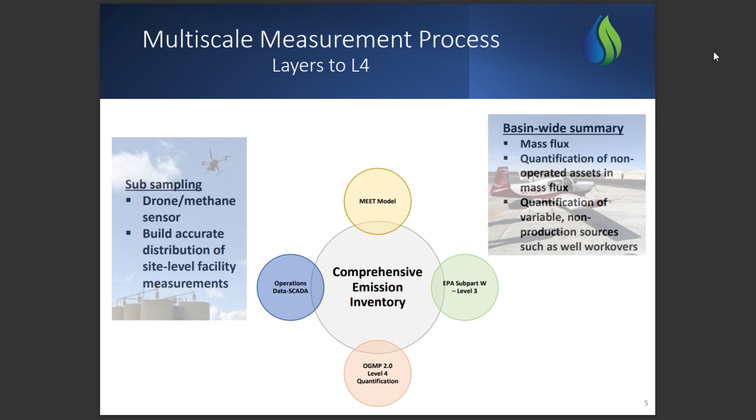So in order to inform that, we're adopting a number of other parts of data and information. One is operational data through our SCADA system, our CygNet system, understanding what is happening in the field and coordinating that with other things going on. We're also using site level and source level measurement efforts through drones, high flow samplers, and other technologies like stack testing our engines. Those measurements now begin to even better inform your comprehensive emission inventory, which is going to ultimately make the reconciliation with a top-down measurement that much more comprehensive.

Then we'll get into a little bit of the basin-wide measurements that we made here in the first quarter of '22, our mass flux. But we also looked at quantification of non-operated contributions within that mass flux, and other types of non-production related emissions that don't happen on a day in and day out basis from our operations, like a workover rig on a well that needs help. We're looking at how those emissions add into the production emissions that we have on a basin-wide basis.

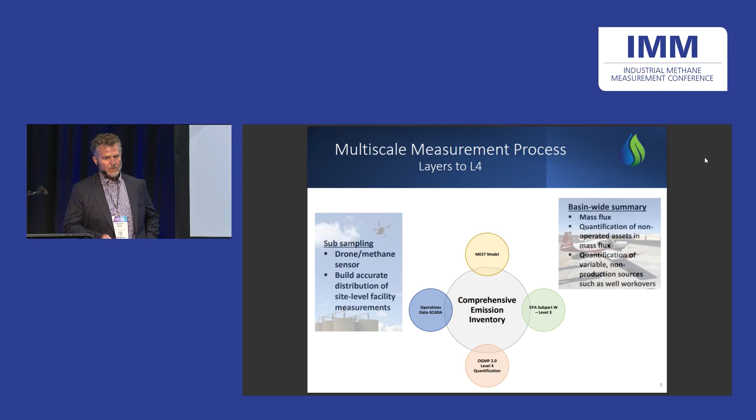The technologies that we're using right now—we've looked at a number of different technologies, but we used a manned aircraft with Scientific Aviation, their Mooney aircraft that you saw in a couple presentations. They conducted raster flights and basin-wide flux flights. We're looking at site-level quantification using a drone and a methane sensor, as well as aerial LiDAR through Bridger Photonics.

And then the bottom up, as I said, we're looking at quantification efforts of different sources. We're looking at high-flow samplers through our LDAR program, our leak detection and repair program, and then looking at an engineering simulation called MEET, which stands for Methane Emissions Estimation Tool. It's an open-source tool that was developed by Colorado State University and other researchers. That begins to give us a broad idea of what each individual facility's emissions look like on a temporal basis, against which we compare our measurements.

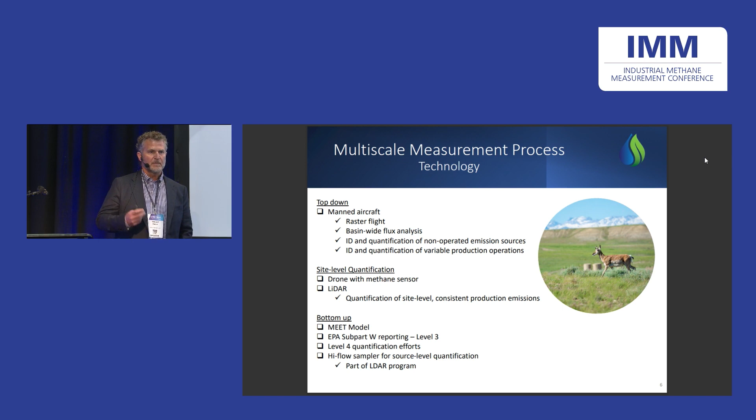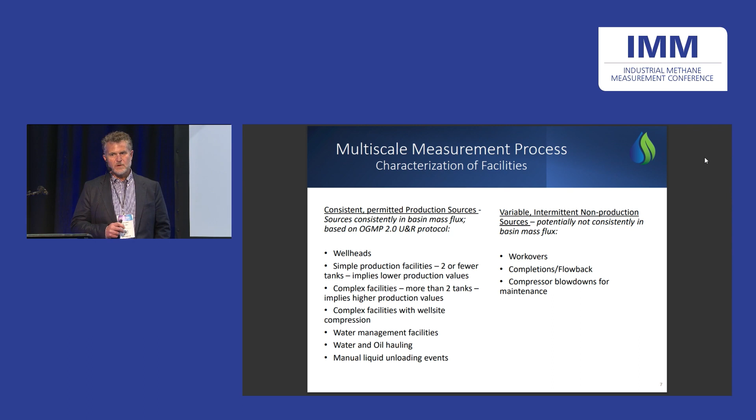We looked at how we characterize our facilities to come up with statistically representative samples. We think there are 5 or 6 different contributions into our production level measurements listed on the left, and then a few of the intermittent, non-production sources that we're looking at on the right-hand side.

This study is really looking at one specific emission source. I don't have time to go into all the ones we've looked at, but this specific source is liquids unloading, when a well has enough fluids in it that it cannot produce. We're predominantly natural gas, and those fluids tend to restrict gas production, especially in older parts of our field where we don't have enough reservoir pressure for the wells to produce.

All of our wells are on plunger lift, and the plungers actually help reduce the instances of liquids unloading through this process. But what I want to walk through is the value of level 3, level 4, level 5, and how it really relates to the emissions for this particular source for us.

Under the EPA and other emission factors that have been developed, the first option would be to look at a per-well basis. Data published by Dr. Allen at the University of Texas indicates 117,000 standard cubic feet per well per year. If we apply that to just the number of wells, we end up with about 3,315 cubic meters of emissions for that well.

If we then take the next step of actually looking at the number of times we conduct a liquid unloading on our wells, the emission factor is actually 9,800 standard cubic feet per event. You can see the difference by tracking the number of events instead of attaching it to the number of wells—you end up with about a third of the emissions. So we view this primarily as some activity factors, but primarily a level 3 effort where we're using an emission factor, but also using some events.

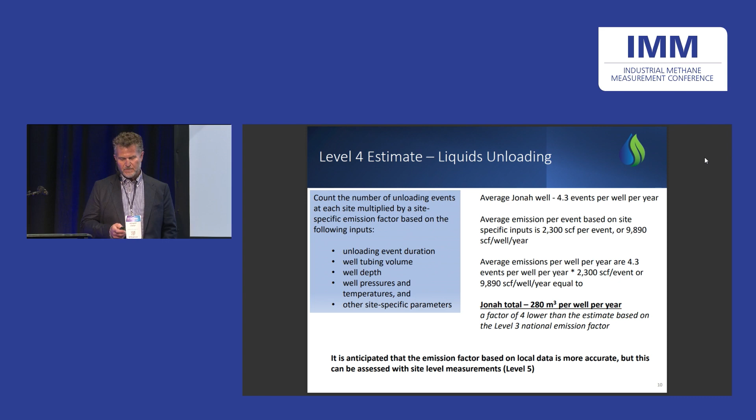So we wanted to see how accurate each one of these different measurements were, and we had an opportunity in April to go out and actually measure using manned aircraft with Scientific Aviation what the quantity of emissions were from 2 different types of blowdown or liquid unloading processes.

One of the key parts of this is we share our data with our operations team and tell them what we're seeing from an emission standpoint. We ask them to go out and say, how can you change operations to make this a little bit better? So the first measurement on the 27th was done comparing a better liquid unloading process, and the second measurement on the 29th was how we generally do this.

We have one of our production coordinators who really takes a look at this and says, I can do this better. You can see the differences—the first measurement on the 27th definitely shows that that is much more in line with the collection of activity factors, well volumes that you're blowing down, and so forth, than the measurement we made on the 29th.

So we think we're honing in now on what is the right process to do a liquid unloading, and making sure that all the calculations we're making through the equation—well volume, duration, pressure, temperature, et cetera—are going to more accurately represent what we're doing. Then we can take that local site level emission factor and apply it to all the events occurring in the field.

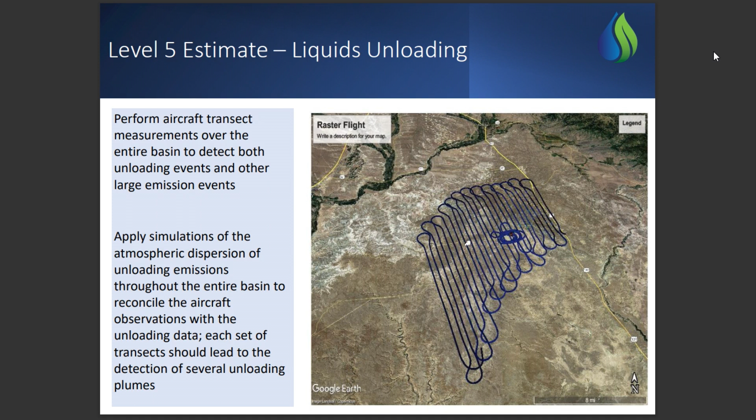We think that because of the number of liquids unloadings we do on a daily basis, the raster flights are picking that up as part of the background emissions. They're either going to see an event or see the plume resulting from an event. So the more often we can conduct raster flights, the tighter we can get those flight measurements.

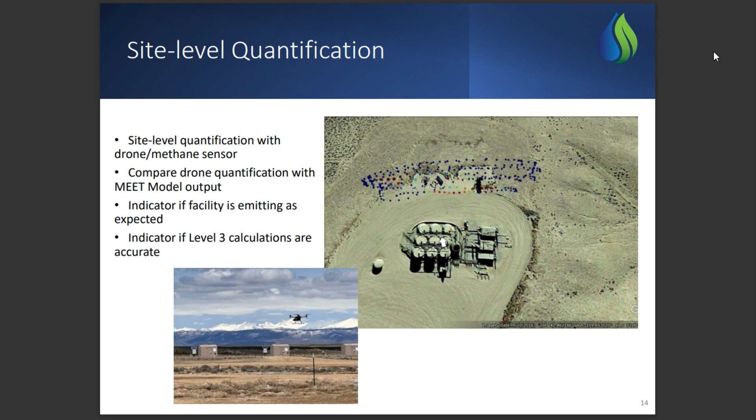The better it's going to be for us to include those liquids unloadings within our overall basin-wide flux. There's a couple other examples I won't go into detail on, but we saw earlier presentations on drone-based measurements. This is a picture of a drone-based measurement we were doing in April, looking at a collection of emission sources at our production facility.

We don't have all the data back on that yet, but this will be work we're doing here in 2022. This was a workover rig on a well that needed some help. We looked at what EPA would say, and they give us an emission factor of 0.54 metric tons of methane per workover. But when we actually did the flight quantification using the manned aircraft and Picarro sensor, we were getting a much higher kilograms-per-hour rate from that workover rig.

So then we could take the workover report our operations team put together and look at how long and what the duration of that emission rate was for that event. If you expand that emission factor over the 78 workovers we did in 2021, it's a factor of 8 higher. So we're going to take that data and use it to better inform the additive values into our overall flux reconciliation.

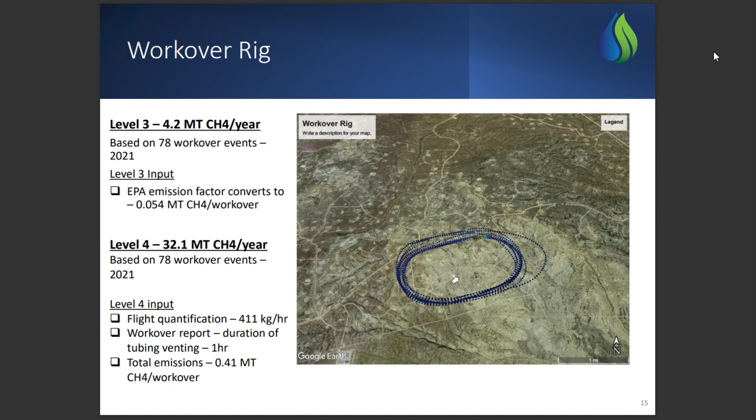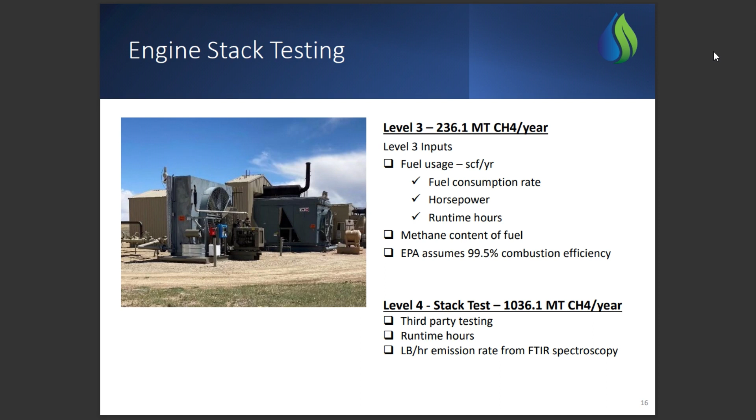Another example: we stack tested all of our engines in 2021 and created methane quantification from them. You can see the difference between a standard EPA emission factor per engine and what the stack testing actually showed. So our year one report into OGMP now includes another 800 metric tons that wasn't included in the original emission factors we put in.

Otherwise, you could be spending a lot of time on gas-actuated pneumatic pumps when it really doesn't have that contribution, because we already collect the emissions from the exhaust off those pumps and put them into a combustor. Every operator, every basin is going to be different on what that answer is, but materiality is really important because it drives limited capital for all of our companies, and we're a very small company—about 0.5% of daily production in the U.S., so relatively small.

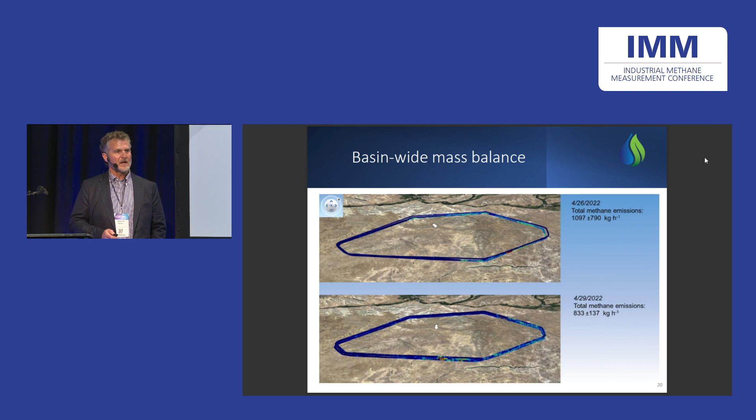We also did some basin-wide flux measurements, and these are two examples of the data we got from that. Those basin-wide flux numbers include our emissions and also some other non-operated contributory emissions. We were able to isolate those with individual flights and understand what the contribution of those non-operated sources are. They're compressors that compress our gas once it's been sold, and they're operated by 3 companies within the basin, not Jonah.

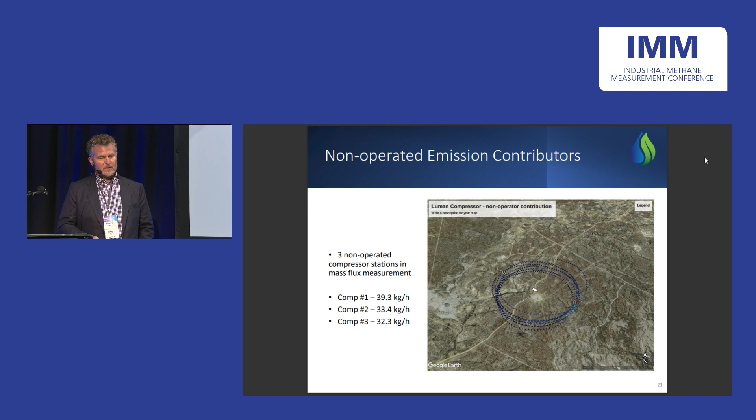thinking about how the reconciliation is going to work, Uh-oh.

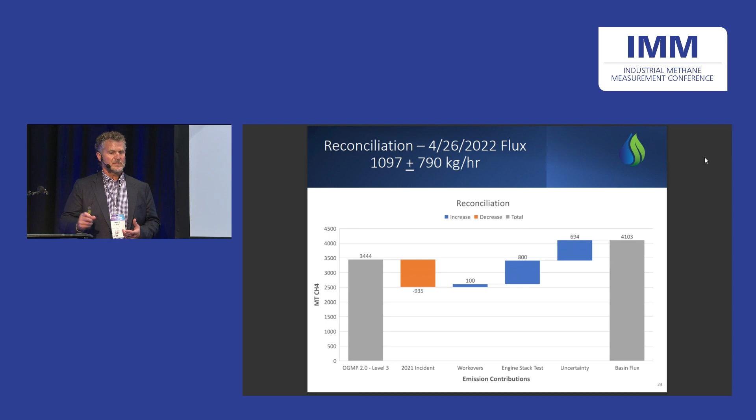So what we're thinking about is when we submit a number to OGMP, we think about all the adds and deductions from that number and compare it against the basin-wide flux. If you look at the flux compared to our year one report in OGMP, it's about a 20% difference. But there's some uncertainty captured within that—some things we know we need to add, and some things that were in our year one report that don't happen all the time. This is just how we're viewing that reconciliation approach.

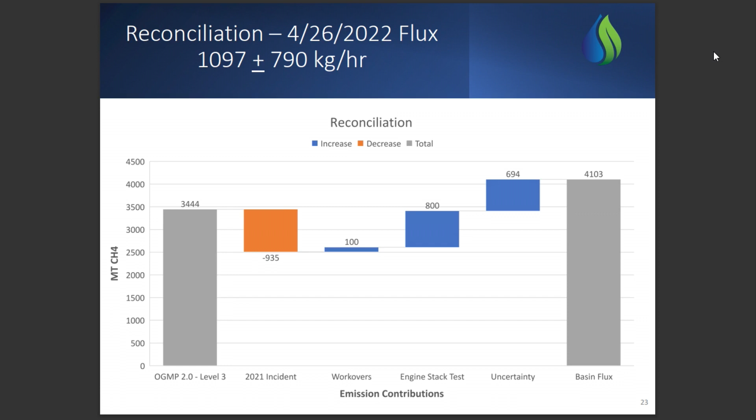Getting more basin-wide flux measurements - obviously one isn't statistically representative, so we're going to need to do that. And then developing other technologies to look at longer-term source patterns, like a drill rig, which is very hard to get with just a drone or a flyover. So can you use an OGI-based camera? We're testing some of that technology right now to get a longer duration emission from those types of sources.

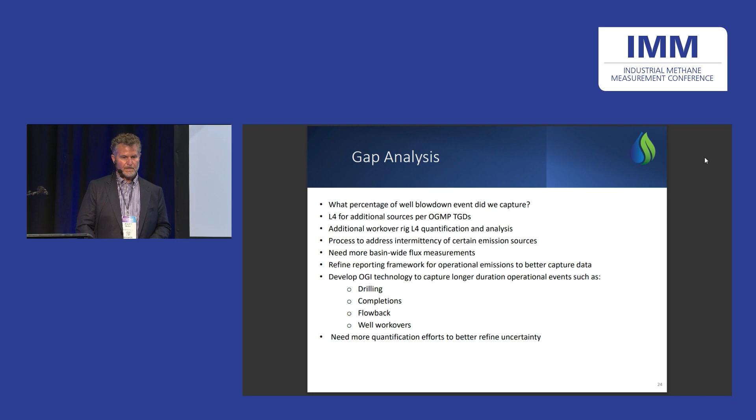So thank you very much, Howard. It's very impressive to see all the efforts that Jonah Energy is doing. So our next speaker is Thomas Röckmann. He's professor at Utrecht University, and he will be presenting the results of the gas ROMEO measurement campaign performed in Romania. Okay, Thomas? Yes.

Thanks a lot, Tanya, for the introduction, and Rod for the invitation. I'll take you back from the industry back to science. I work at Utrecht University, and I'm presenting the project with arguably the nicest acronym, the ROMEO Project - Romanian Methane Emissions from Oil and Gas - which we did together with a large group of people. Here you see again, maybe the most famous aircraft today, the Mooney aircraft of Scientific Aviation.

It's probably the most photographed aircraft in this meeting so far. Mackenzie is also here, who joined us in the campaign. And there are many other people, which I didn't put all the names on here, and it's also only half of the people. So there was a big group of scientists in Romania for this measurement campaign.

Let's see whether this works. Yes. I will first give you a short rationale why we went to Romania to do these measurements. Then I will give a short campaign overview. I will talk about the methods that we employed and then show you some results.

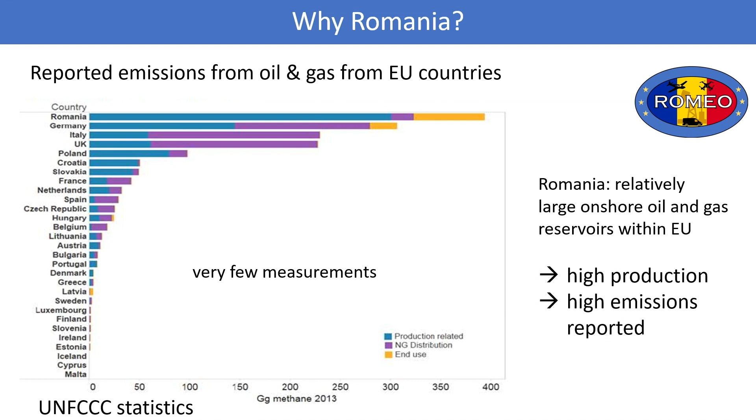They have relatively large onshore oil and gas reservoirs. So in principle, you should say, well, there's high production, there's probably also high emissions, but we should actually go there and find out what the emissions are like.

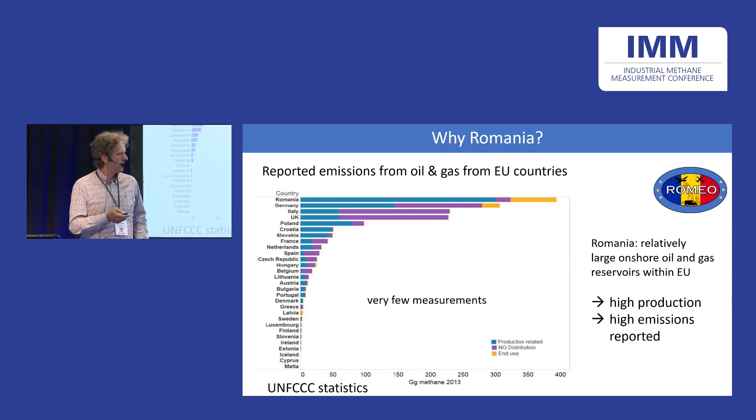We went with a rather large team. It was part of a Marie Curie training network that was financed by the EU. We got additional funding from UNEP, the Climate and Clean Air Coalition, and EDF was also involved.

We had European partners from the UK, France, Germany, Netherlands, Denmark, Sweden, Poland, Switzerland, and we all went to Romania and carried out measurements together with a couple of Romanian partners, especially our host institute, INCAS. But then we also had links to the ministries of environment and energy. We had two energy operators on board, OMV Petrom and Romgaz, and then we also had a company here, the sniffers, and scientific aviation that came with the aircraft. So it was quite a big effort in terms of this CCAC project - certainly one of the bigger ones.

Oh, that was one too fast. We first got information from one of our Romanian partners about the oil and gas reservoirs, and here you see Romania, with the red oil and gas reservoirs operated by OMV Petrom. The green ones in the Transylvanian Basin are operated by Romgaz, and the blue ones are all other operators. So these two that we have in the team are really also the main operators in Romania.

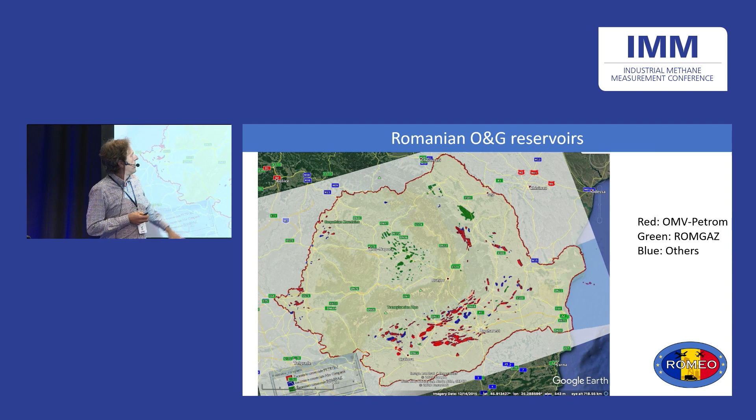In this talk, I will focus on the measurements here in the southern part of Romania and the second phase of the ROMEO project, which is now being evaluated by the University in Krakow. That will be - well, I will not cover that here.

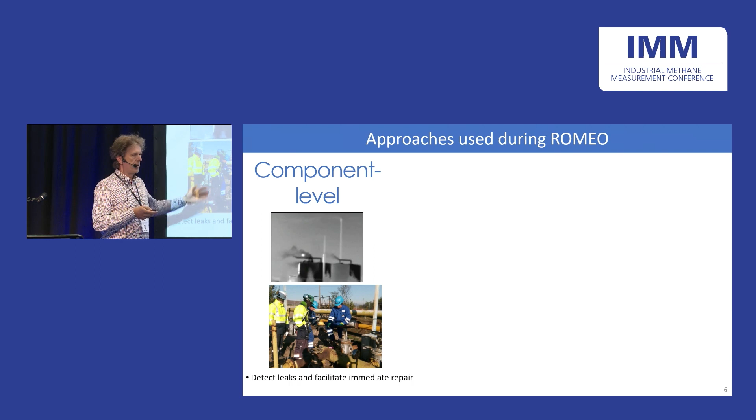We did certain types of measurements. We did component types of measurement with optical gas imagery and the high flow samplers to find really leaks on individual components. We did site level measurements where we often drove past plumes, either with or without additional tracer release, sometimes also not mobile but standing in the plume, the so-called OTM33A method.

This is for facility type quantification. And then we also had, with the aircraft, basin type quantification where we made these box flights that you have seen also a lot today, but which I will also not cover in this presentation.

Then we come to the results. I will present the results first on the component and site level.

We had a team from the sniffers in Romania. They went with the OGI camera and we sent them on different days to different regions and said, examine some of the wells there, also larger facilities. They visited in total 181 sites. 155 of them were oil wells, and they also recorded images and videos.

My student, is she here, Fortini? She has really watched all these movies and made statistics of that. And when you just look at that, the most simple statistic is that 50% of the facilities they visited had leaks visible with the OGI camera, and 50% did not have leaks.

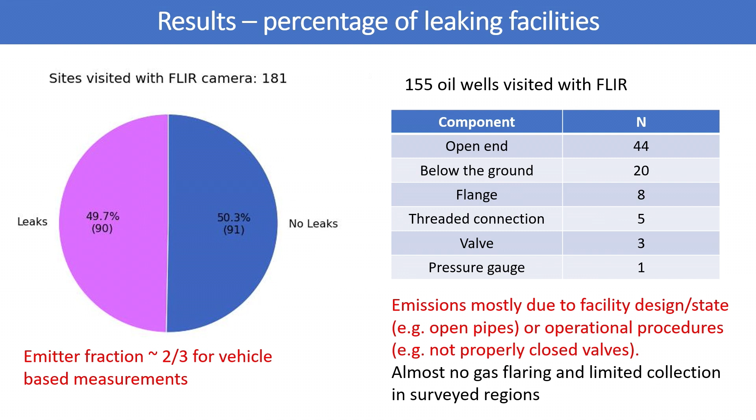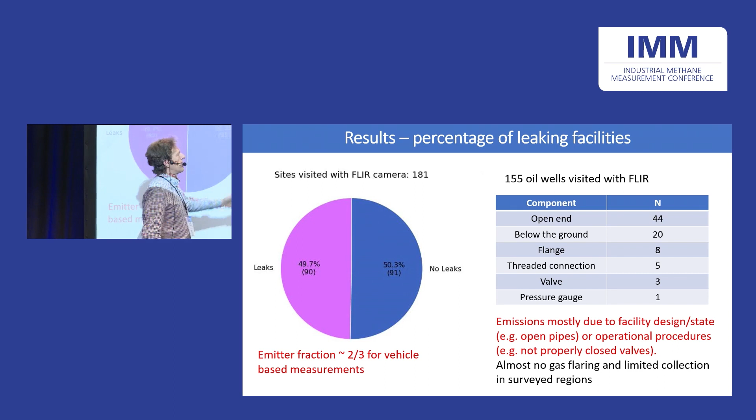Some of the people that did the measurement said, yeah, there is a pressure gauge missing here or a valve missing here—it's simply not there. And then there's another large fraction coming from below the ground, and we assume that maybe these are also some open ends down there. Compared to this, the real technical things that can be fixed, like flanges or threaded connections or valves, are actually in the minority.

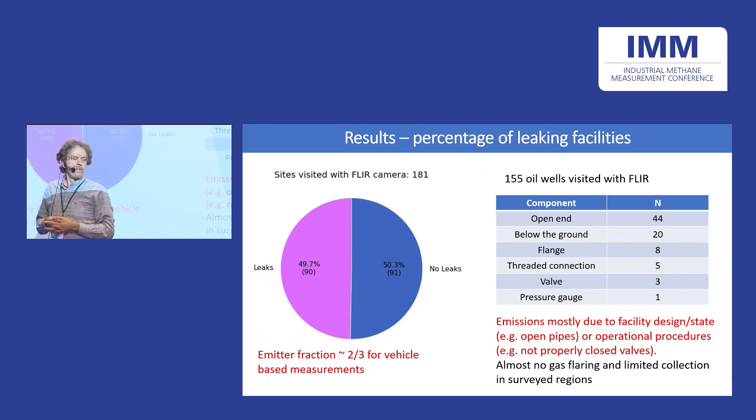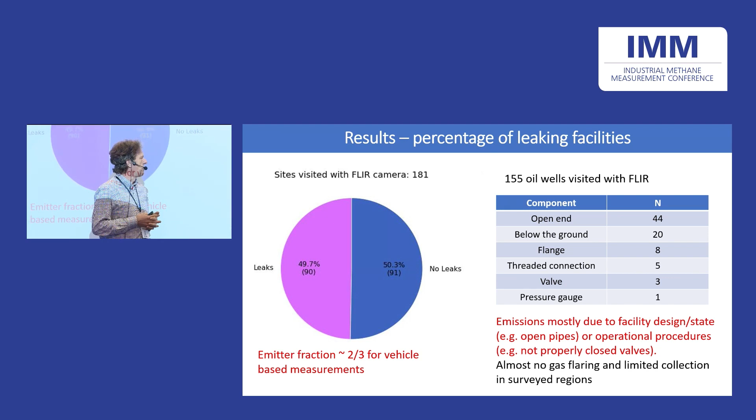So we conclude that, simply based on these data, the emissions in this area are really mostly due to the design or the state of the facility or the operational procedures when valves are simply not closed. That's also what we saw sometimes.

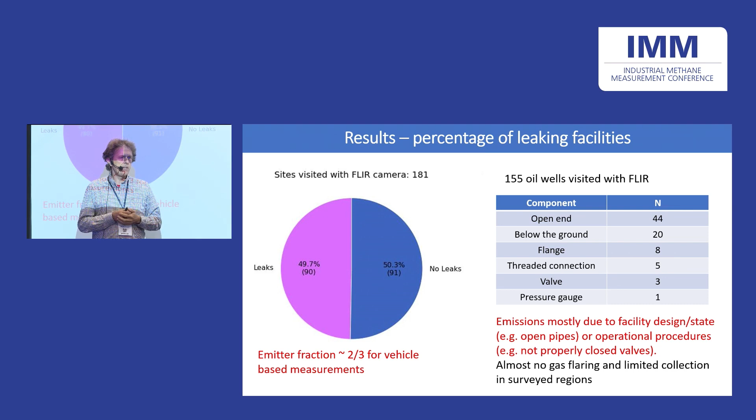Another point is that this southern part of Romania is mostly an oil production region, but there was almost zero flares. We never saw it, which means there's simply no flaring happening there. It's very easy to spot this.

I told you that this 50-50 spread between emitting and non-emitting sites was even on the low side. And we have a nice proof of concept here that operators can actually do better, because there was one part of the region that was associated with H2S emissions. H2S is dangerous, so the operators do their best to keep the emissions low.

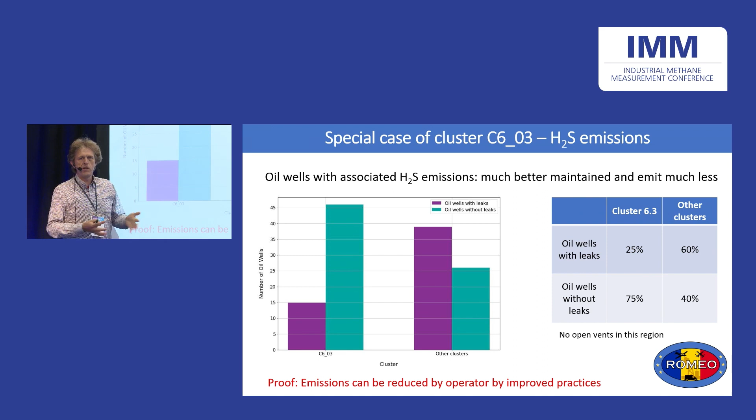So that is actually a proof of concept that if these operators actually do it properly, they can reduce emissions quite easily. In this cluster, we had 25% of the facilities with leaks, and in other clusters it was...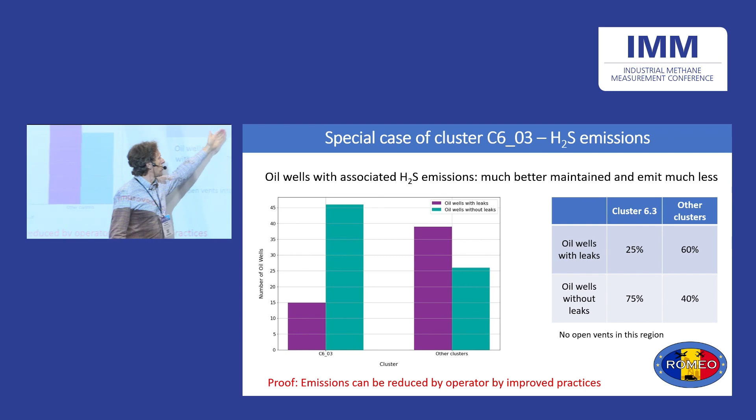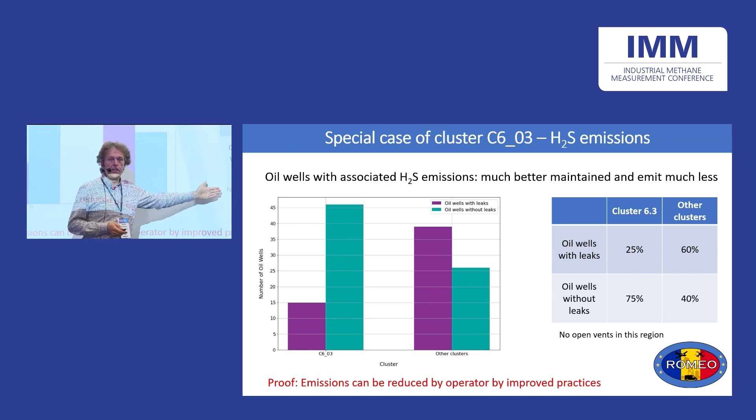Where am I? Yeah, so this was low, and in other clusters it's much higher, and that then also agrees with what we found with the other vehicles. And also in this region we found obviously no open vents, so they never actually let the gas simply out because it's dangerous.

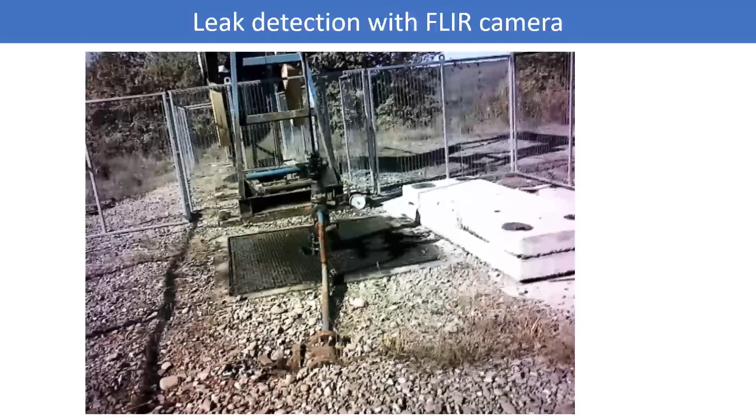How does it look? Who spots the leak on this movie? Well, when you know it, you can probably already guess it. This is the FLIR camera. You see there is an open end here, and when it now changes to the infrared mode, you will see that there is simply a plume—it takes some time—of methane coming out of it. Here you see the plume of methane coming out of this vent. You don't need to be a PhD or professor to fix this. So that is also relatively easy to find and to improve the emissions.

So this part of the infrastructure, we saw that it has a very variable maintenance state. We mostly analyzed oil infrastructure, but we also had some gas facilities, and at the gas wells we generally see lower emissions, but sometimes, again because of improperly handled equipment like not properly closed valves or vents, we also saw high emissions there. It was again less often leaking equipment.

Then we sent the LDAR team to two compressor stations. In one they found 58 leaks, and in another they found 27 leaks, mostly on technical equipment like flanges and valves. They came back the next day and together with the local team fixed 31 of them in a single day, so they already reduced emissions relatively easily. Again, not rocket science, but it means that if you don't go there, you don't see it and you cannot fix it. And if people don't have the equipment to find it out, a simple camera, they also cannot really make progress.

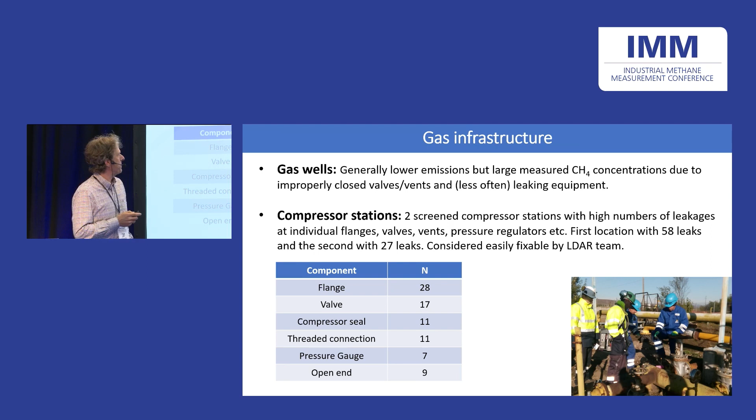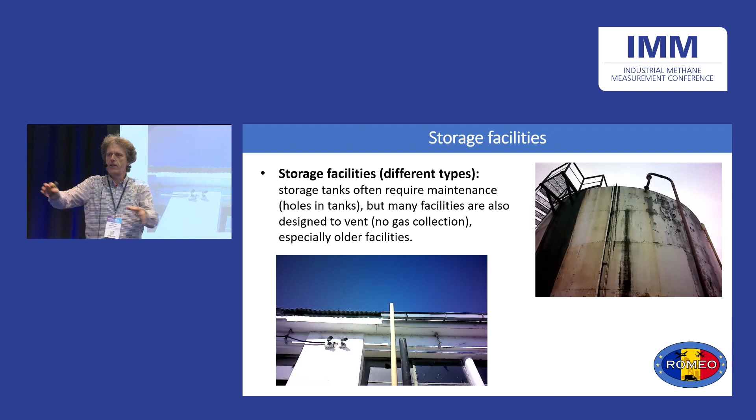We also have the storage facilities. Let's assume they fix everything at the wells, they collect everything, they bring it to the facilities, everything is fine at the well, we find no leaks there anymore. But then they go into these tanks, and very often there will be issues there too. There should be a movie here.

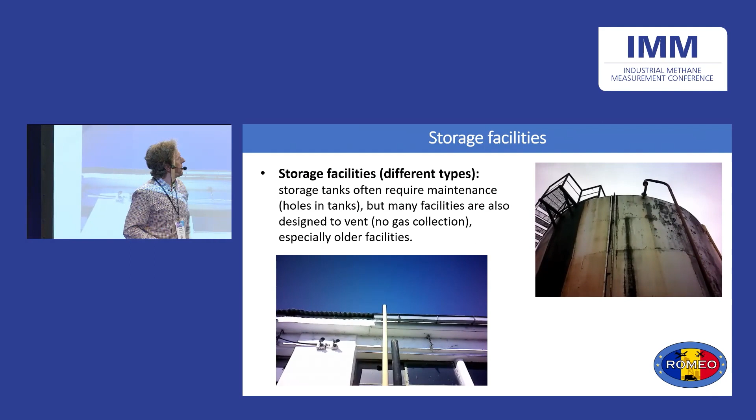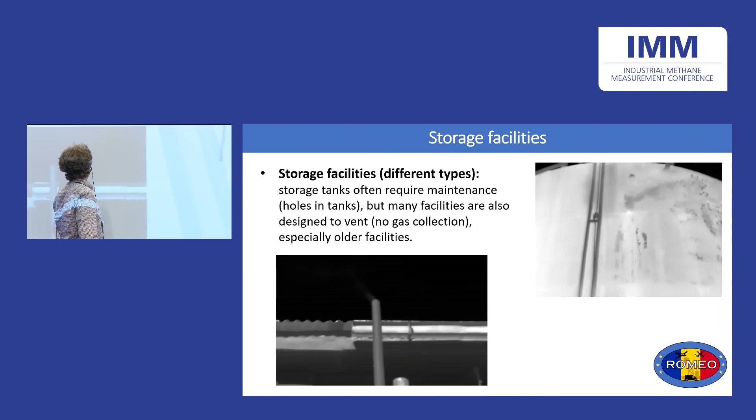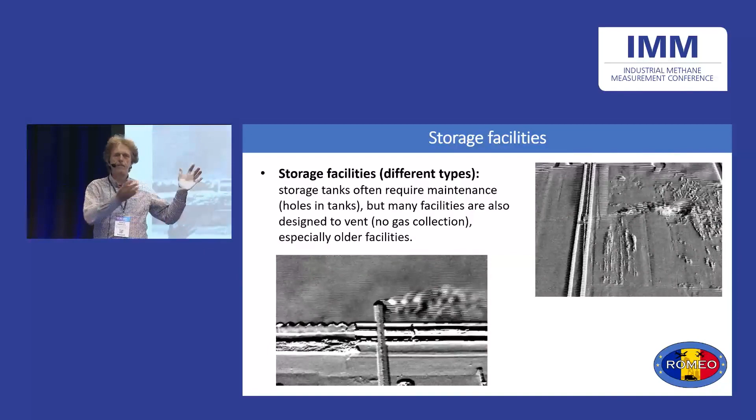Oh yeah, these are storage facilities below here, and there's another one over there. Sometimes when you look at that, you can already see that maybe there will be leaking here where we have these rusty parts. You'll see it later. So there's a leak up here, and we have this open pipe. You only see it later in the flickering image. There's simply a vent here, right? So even if they fix all the leaks, if the infrastructure that follows up doesn't really take care of it, it will still be released.

Stefan and I talked to an operator who said, yeah, we used to have a flare, we used to have a compressor, they don't work anymore. Now, once a day we go and let the methane out to the atmosphere. So this is another story compared to the operator talk we had here before.

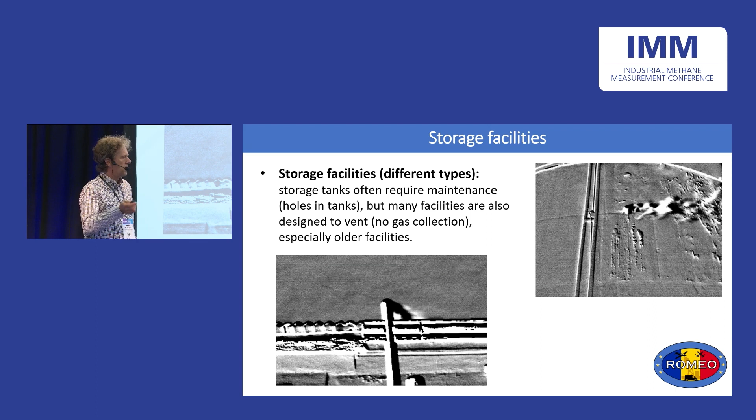We are also doing emission quantification. As we know on all production basins worldwide, the range of emissions is really high, from negligible emissions that we can only measure with the tracer release method, to something on the order of 300 kilograms per hour, which is not a super emitter but is quite a big emitter in Romania. What you also see is that the cumulative emission distribution always shows that a really small fraction of the sites, 10%, are responsible for 70% of the emissions. So if we're able to reduce these emissions, we're already pretty close to the global methane pledge we want to achieve, if we really focus on these big emitters.

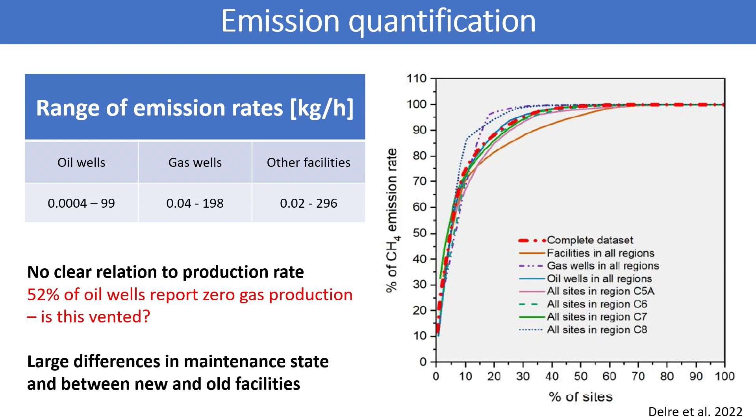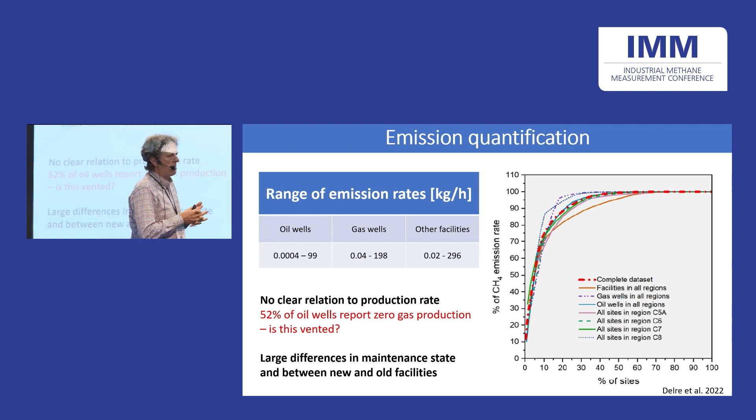What we also found is that there's not a clear relation to fossil fuel production, which has also been shown repeatedly elsewhere. But what we found interesting, after getting all the numbers from the operator, is that 52% of the sites report no production, zero gas production at the oil sites. Is that realistic? We think there's always a bit of gas associated with the oil, so maybe not reporting simply means it's not collected. Maybe this is from the open vents, because when you vent it out, it will never actually reach a meter where it can be metered and reported.

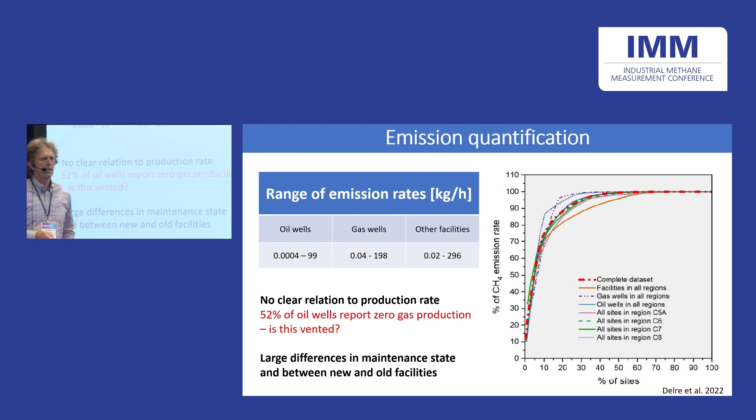So we also used different techniques: we have drones, which you've heard about, we have the OTM33A method, and we have the tracer dispersion methods. We're still struggling, for weeks and months now, to reach statistically robust conclusions for this study because it is hard. Now I'll show you only the good part of the story.

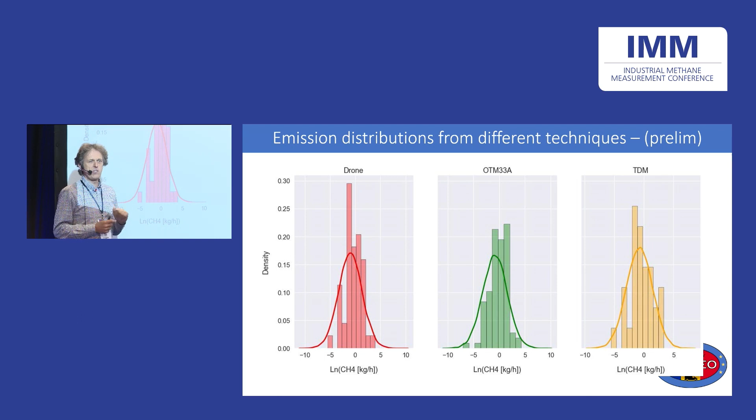If you take the really carefully evaluated studies, only the ones where we're sure they work, we get for all these different distributions something that passes a test for a log-normal distribution. There's the logarithm of the emission rate, so we can fit a normal distribution to this logarithmic distribution of emission rates. They all pass the test, so it's an appropriate model. And if you put them all together, this is what the different techniques show - which is maybe too good to be true.

And what do you want to do further? Of course, I could give you the number already, but we still want to be sure before we actually give a number out here. We want to derive a final representative emission factor for the Romanian gas production in the southern part, and then make an upscaling to the national scale. We also have the aircraft evaluations that we want to compare to what we find on the ground for the individual facilities. And then we also want to compare to the inventories and the reported emissions. I already told you, I looked at the EU reports, and it's really written that the largest savings in methane emissions have been made in Romania. You see sometimes from one year to the next a 40% reduction. When I scratch my head and think, how realistic is this? But we will have a look at that and also come back, hopefully, with an emission factor that is also interesting for making mitigation plans and so on. And with that, I'm at the end of my talk, and I thank you for the attention.

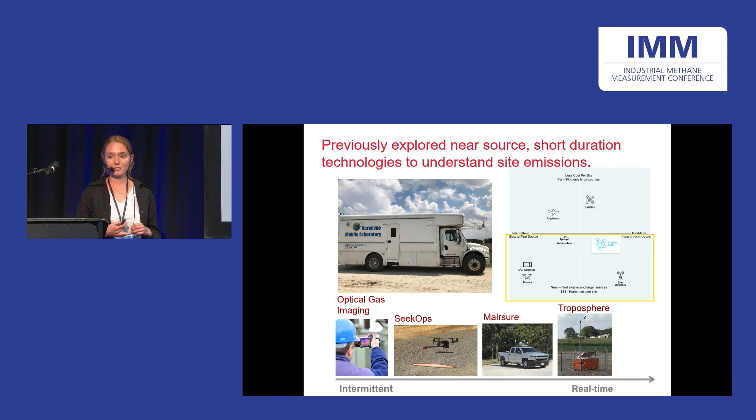To give a little bit more context on the measurement technologies, we can think of it in 2 different classes. There are measurement technologies that are capable of covering large swaths of land, like aircraft or satellite technologies, which, because they can measure a large number of sites in a relatively short amount of time, have pretty low costs per site. Whereas on the other end of the axis, we have things that really measure at the site level, like a continuous monitoring sensor. The other variable that can distinguish measurement technologies is how quickly they're able to determine leaks or anomalous emissions. So if you have an aircraft campaign that occurs a few times per year, if you have an emission event, you may go a while before you're able to detect that.

Whereas on the other end of the spectrum, if you have a monitor at that site that's collecting continuous data, you would know in near real time if you have an enhancement in your methane emission.

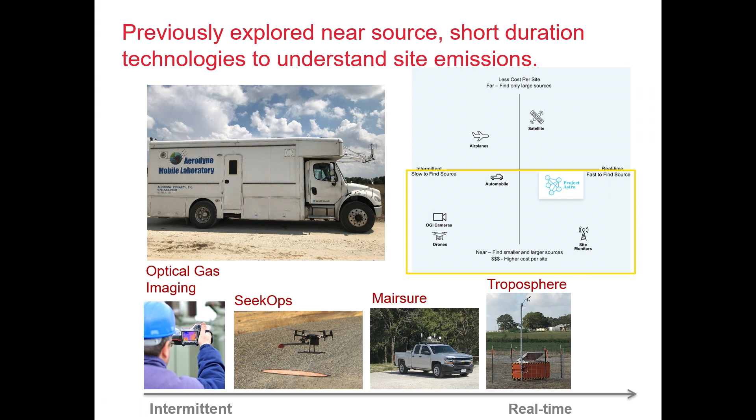For the first case study I'm going to present, we looked at this bottom half: drones and a tracer measurement on a vehicle-based measurement device. This was a case study done in East Texas, where we measured 33 sites over the course of 3 weeks.

But on a site level, there's pretty poor agreement between these two different measurement mechanisms. That's likely due to the large temporal variability of these emissions, because they weren't measured at the same moment in time—they were measured over the same 3-week span, but could have been a few days apart. Because of that high level of intermittency, this poor agreement is likely explained by temporal variability.

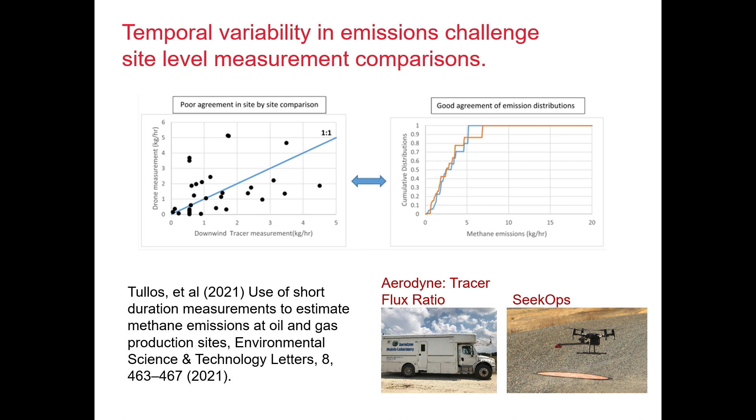We also looked at a case study in the Permian Basin, which is a high oil producing region with slightly more complex sites. We looked at over 100 tank batteries and compared that to drone measurements and various different types of airborne measurements.

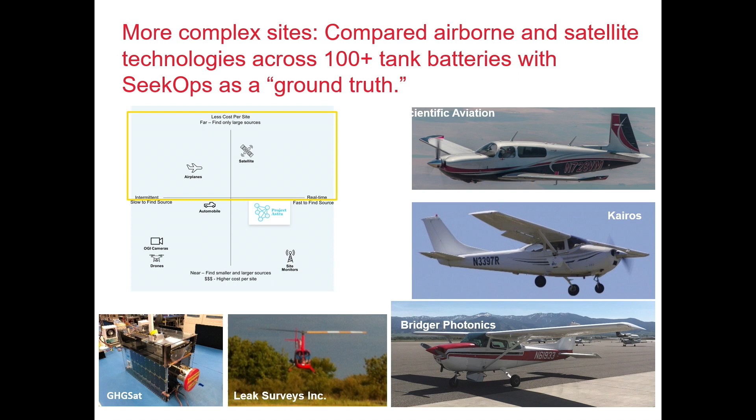I'll go over some of the different aircraft technologies that we used and quickly describe the data products that come with these.

The next technology we looked at was Bridger Photonics, which uses LiDAR to measure the path-integrated methane concentration. You can see the image that comes from the Bridger Photonics technology.

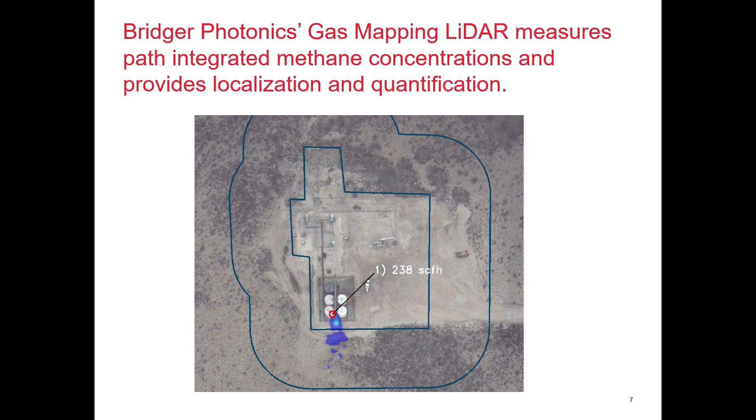We also use Scientific Aviation, which has been mentioned before. Scientific Aviation has a Picarro, so it performs in situ methane measurements, and it flies in a spiral pattern so that it transects both the upwind and downwind concentrations, flying in a vertical cylinder to try to get the entire height of the plume.

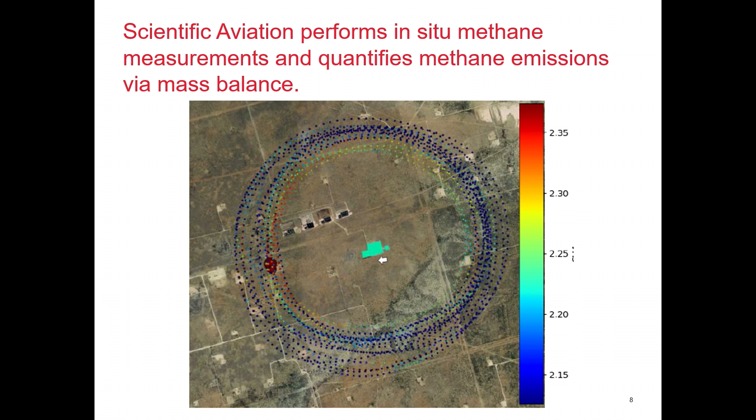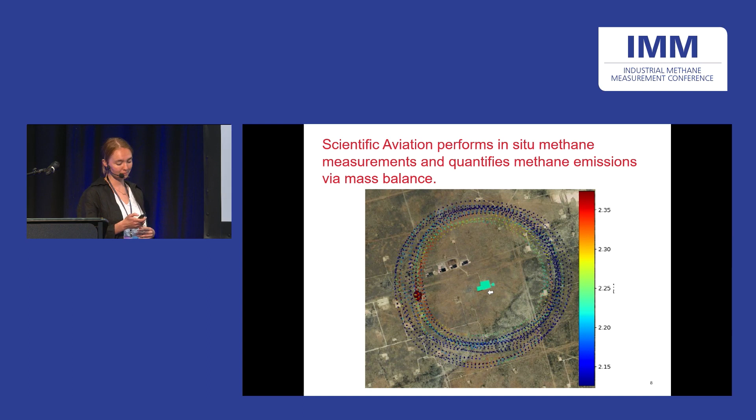It uses those concentrations as well as wind data to conduct a mass balance and determine the rate of methane emissions coming from the source or from within the area that it measured. We also looked at Kairos, which uses reflected sunlight absorption spectroscopy and also takes optical gas imaging of the plume, which is shown here.

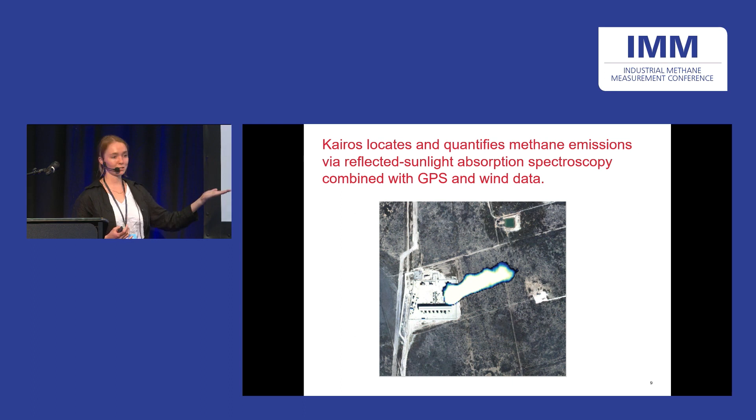So we compared, again, the distribution of these different technologies. This shows on the x-axis the estimated or measured emission rate—the small emissions are all the way on the right, and the higher emissions are here—and then the fraction of the emissions observed.

Again, there's relatively good agreement when you look at it on a distributional basis, especially on the side of the smaller emissions where there are more data points collected as well.

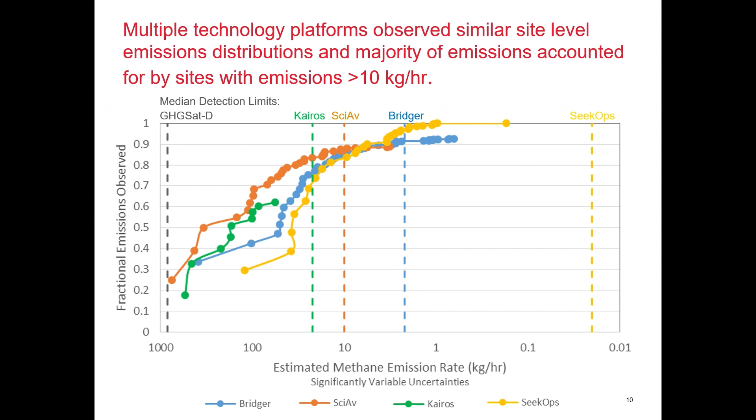Likely the reason for these discrepancies is not because the technologies missed it, but because the emission source stopped emitting, since the measurements were taken a few days apart. Again, this is likely due to the large amount of temporal variability.

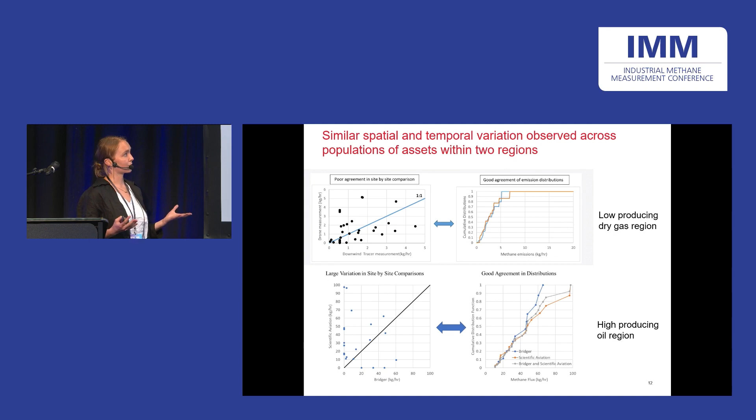So just to summarize these two case studies: on a distributional basis, there is pretty good agreement between different measurement technologies, even across different production regions. For the East Texas case study, a low-producing dry gas region, there was poor agreement on a site-by-site level, and it would be really complicated to reconcile it on that basis. But when we look at the distribution of emissions, both technologies delivered a similar cumulative distribution. We saw the same thing in the Permian Basin, a high-producing oil region.

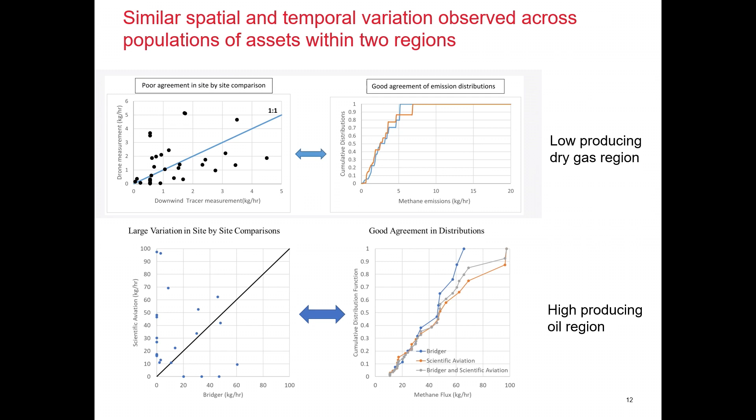To try to answer this question, we did a simulation-based case study in the Barnett Shale. I used the methane emission estimation tool, which provides fine spatio-temporal resolution methane emission estimates for 50 prototypical sites in the Barnett Shale. I also simulated one characteristic of Barnett Shale emissions: high emission events that are relatively rare. They occur only about 1% of the time, but they're important for emission inventories because they account for about 50% of emissions.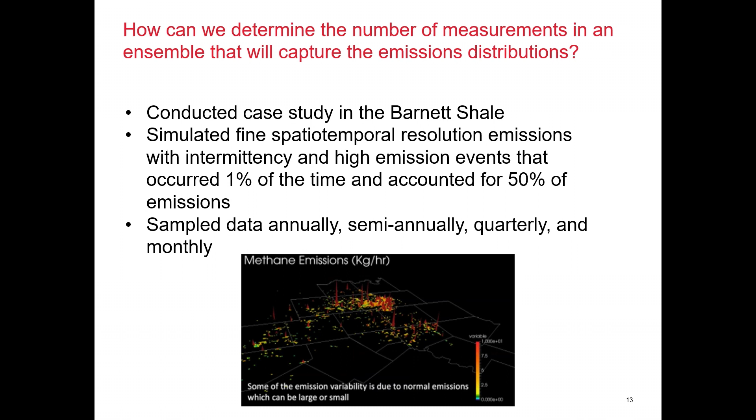So we accounted for that behavior, and we varied the duration at which these events occurred, from six months down to a day, keeping it consistent that they occurred 1% of the time. Then we took that time series and sampled it annually, semi-annually, quarterly, and monthly to see what the inherent uncertainty is when you try to take short duration samples of a really intermittent data source. This assumed no measurement uncertainty—just the uncertainty introduced when you take snapshot measurements of something that's really variable.

What we found was that the duration we selected for these high emission events actually impacted the percent error we found based on different sampling frequencies. As expected, the error increased as you sampled less frequently, but we also found an impact from the duration of these high emission events as well.

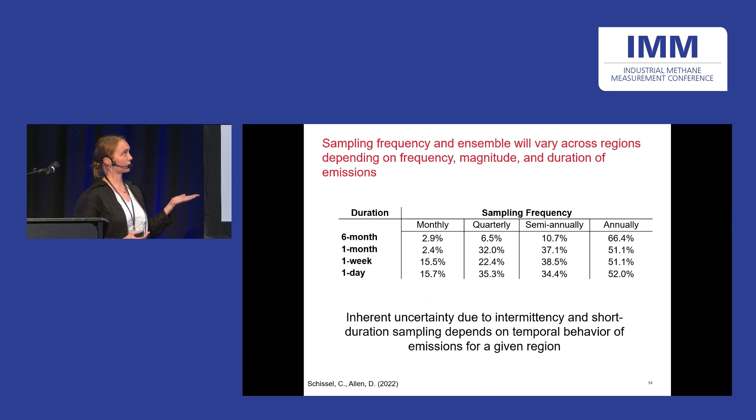So what this case study demonstrates is that the inherent uncertainty due to intermittent and short duration sampling really depends on the behavior of the region. When designing measurement methods, you need to consider the characteristics of a given region specifically, and likely a measurement methodology suitable for one region can't directly be transferred to another, because even within the Barnett Shale, depending on how we define the duration of these high emission events, there are differences in the outputs we found.

So just to quickly summarize the findings from these different case studies: there is significant short-term variability in emissions from production regions in the United States, and that's really important to consider when interpreting these snapshot measurements. But there is reproducibility from these short duration measurements if we consider an ensemble of measurements or an ensemble of sites and look at it as a distribution rather than trying to match on a site-by-site level. We saw that across different regions, both in East Texas and the Permian.

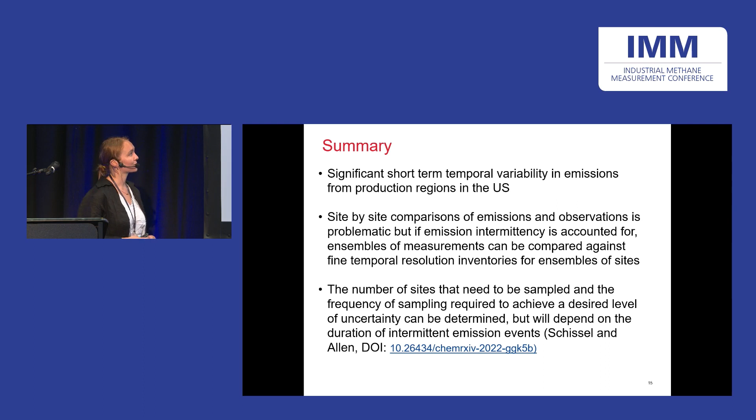Depending on how you want to define that ensemble to get a reproducible distribution will depend on the temporal behavior of emissions themselves. So we demonstrated a case study for the Barnett Shale, and similar analysis could be conducted for other regions depending on the temporal characteristics of your basin. But depending on what those emissions look like, that will inform how you select your ensemble. So that was all I had prepared. Thank you.

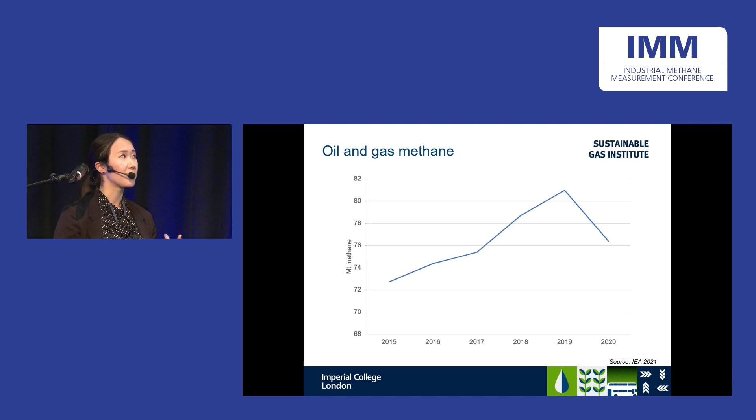One area where there is a high degree of uncertainty is how much methane is emitted across individual gas supply chains, and that's something we've tried to answer in a recent paper. I say recent paper, it got published last year, so I guess that counts as recent. In this work, we estimated emissions for the world's largest gas supply chains, taking into account the largest natural gas producers, consumers, and exporters and importers of LNG and pipeline gas - 17 countries, which account for between two-thirds and three-quarters of global gas production, consumption, and trade.

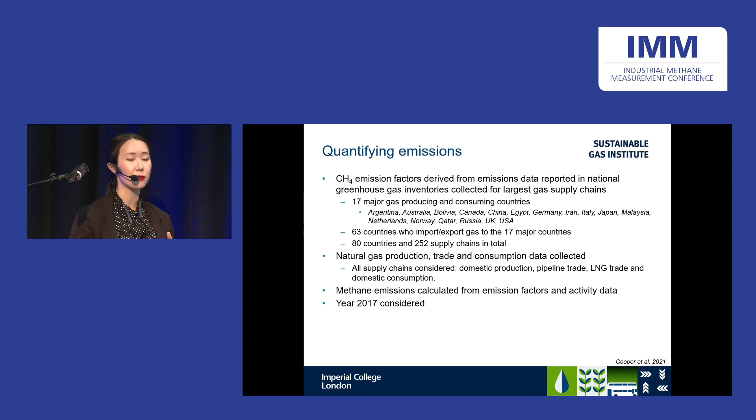For these countries, we estimated their emissions, also taking into account the emissions of the countries that import or export gas to them. In total, we considered 80 countries and 252 gas supply chains, which included domestic production, consumption, pipeline, and LNG trades. We estimated these emissions based on emission factor data provided in national inventories submitted to the UNFCCC, and we estimated the emissions for the year 2017.

In the emissions data that we collected, so in submissions to the UNFCCC, countries estimate their emissions using one of three methods - tiers 1, 2, and 3. Tier 1 is when you estimate your emissions using generic emission factors developed by the IPCC, and they're very generic. There are two sets - one for developing economies and economies in transition, and the other for developed economies. Tier 2 and 3 are higher level and involve the use of actual measurement data towards estimating the emissions.

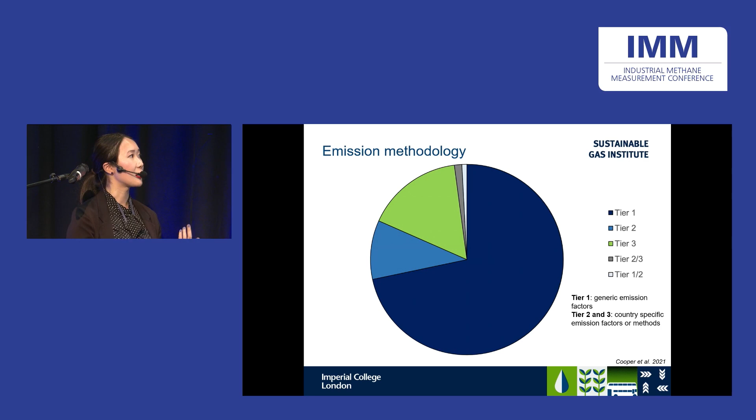As you can see in the data we collected, there's a really big dependence on Tier 1. That means that for a lot of countries, they just don't know what their emissions are, so they have to use Tier 1. But using the data that we did collect, we estimated the emissions intensities across the different gas supply chains, and we found there was a very big variation across supply chains. The most important factor that impacted the emissions intensity was the methodology used to estimate your emissions.

For countries that use Tier 1, for example Iran, Malaysia, Egypt, their emissions were estimated to be higher. That's because the Tier 1 emission factors, being quite generic, are much more conservative, so they tend to be higher than the emissions you would estimate if you were to use Tier 2 and 3, which is why for USA, UK, Norway, the emissions are much lower.

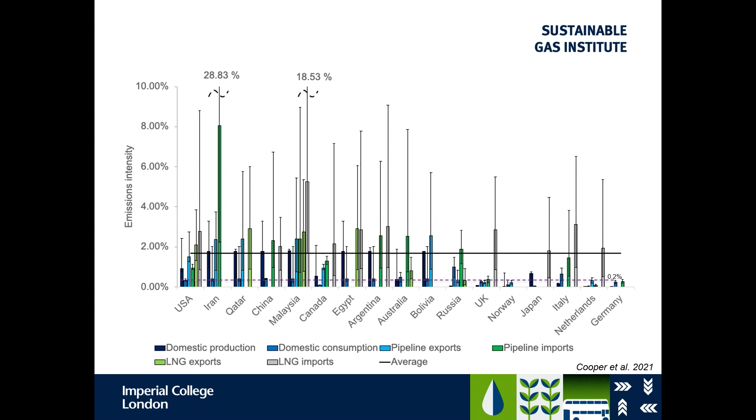So going from the emissions intensity into quantifying how much methane is emitted - when you go from emissions intensity into kilotons of methane emitted, high emissions don't necessarily correlate to high volume of methane being emitted. That's because when you want to quantify how much methane is being emitted, it's the throughput that's the most important factor, which is why the USA and Russia are the two highest emitting supply chains - their throughput of gas is just much larger than the other countries and supply chains.

Despite these two supply chains having emissions intensity that's about average or below average, because their gas throughput is so much larger than everyone else, the amount of methane being emitted is much larger. Something that was interesting in our analysis was when we looked at different import and export routes.

So the country of origin does play an important factor. If we consider pipeline imports to Italy and compare them with pipeline imports to Germany, you can see that Italy has much higher emissions.

And that's in spite of Germany being the world's largest importer of pipeline gas. That's because Italy gets a significant portion of their gas from North Africa, where Tier 1 is used to estimate emissions, whereas in Germany, all the gas comes from within Europe, where Tier 2 and 3 are used more often. So that does translate into Italy having higher emissions associated with their pipeline imports.

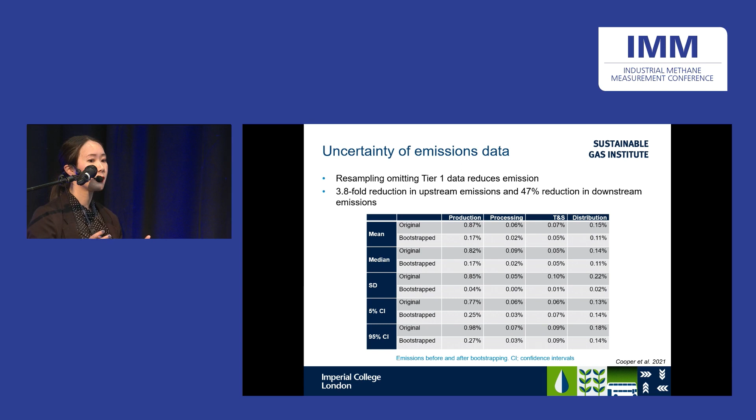We found that in the upstream, there was a 3.8-fold reduction in emissions, and a 47% reduction in downstream emissions. The upstream sees a much bigger drop in emissions, and that's because a bigger proportion of gas-producing countries use Tier 1, whereas in the downstream, more countries use Tiers 2 and 3, so they were slightly less impacted when we did our resampling.

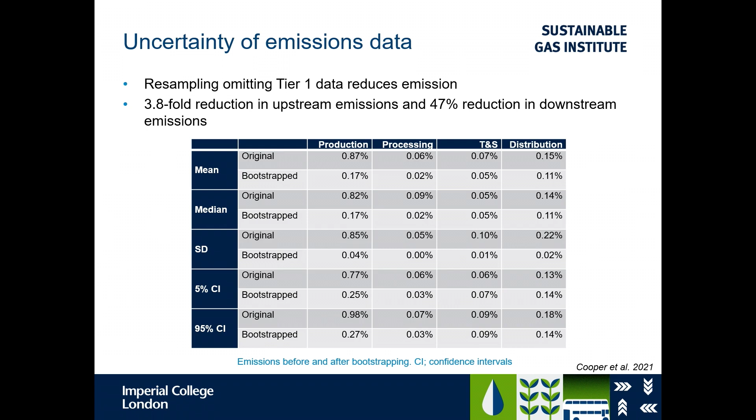And finally, moving on to a new piece of work that we've just recently started. We're looking into the emissions methodology approaches used by different countries in the EU, to try to compare whether or not the new regulations specified in the new EU methane regulation are fit for purpose and how effective they could be in cutting emissions and what kind of cuts they could achieve.

When we were assessing the most recent submissions to the UNFCCC, the 2021 submissions, reporting emissions for 2019, we found that even in the EU, there's still a very big reliance on Tier 1, with some countries not having any data on their emissions, so relying on Tier 1. And for quite a few countries, even though they have measurement-based data on their emissions, they still rely on Tier 1 for some aspects of their emissions.

For example... which one? Not that one. Let's see.

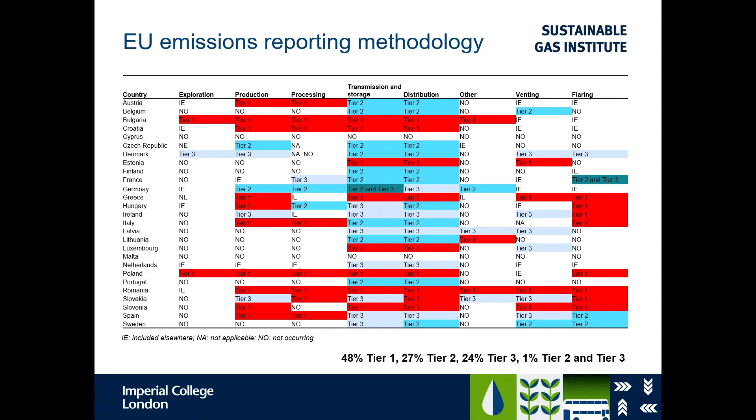So for example, Austria, they do produce gas, but very small quantities. Because the quantity is so low, they just assume Tier 1 emission factors, but they do apply Tier 2 to their downstream emissions. That brings me to my last slide.

In conclusion, we have estimated the emissions across the world's largest gas supply chains and found that there is a very big variation in the emissions. In terms of emissions intensity, the methodology applied does have a very significant impact, with countries that assume Tier 1 having much higher emissions than those that assume Tiers 2 and 3.

And when we looked at the methodology used in reporting emissions in the different EU member states, we did find that even in the EU, there's still a big dependence on Tier 1.